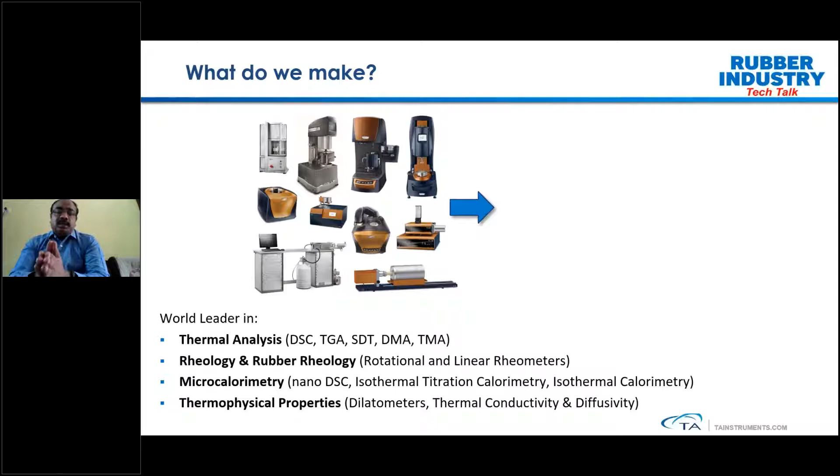Again, here we have got various instruments such as dilatometer, thermal conductivity, diffusivity. These instruments are mainly used to understand the physical properties, thermophysical properties such as thermal expansion, shrinkage, thermal conductivity, diffusivity. With that series of products, we are actually touching every aspect of material. You can name anything - polymer, thermoplastic, pharmaceuticals, thermoset, inks or coatings, rubber, elastomers. We are there, we have a solution for that.

We have our instruments, and most of our customers are using our equipment mainly for having a better understanding about the molecular structure of their particular materials. And today also what we are going to focus on is more about thermal analysis, where I'm going to show you how our instruments are going to help you to have a better characterization of rubber and rubber polymeric materials.

Let's get back to the topics of today's about thermal analysis. If it comes to the typical properties which are measured by thermal analysis, one is the weight. So we subject the sample to a change in temperature, and then we will be seeing how the weight of a sample is going to change. That is we call as thermogravimetric analysis.

Another aspect is about the heat flow. So when you change the temperature of your sample, how the heat flow is changing - that is measured by measuring the heat flow. These are the two techniques we are going to focus on today. One is the weight - performing analysis by thermogravimetric analysis. Another aspect is heat flow, which gives you more information about the thermal transition of the particular polymeric material, using differential scanning calorimetry, or we call it DSC techniques.

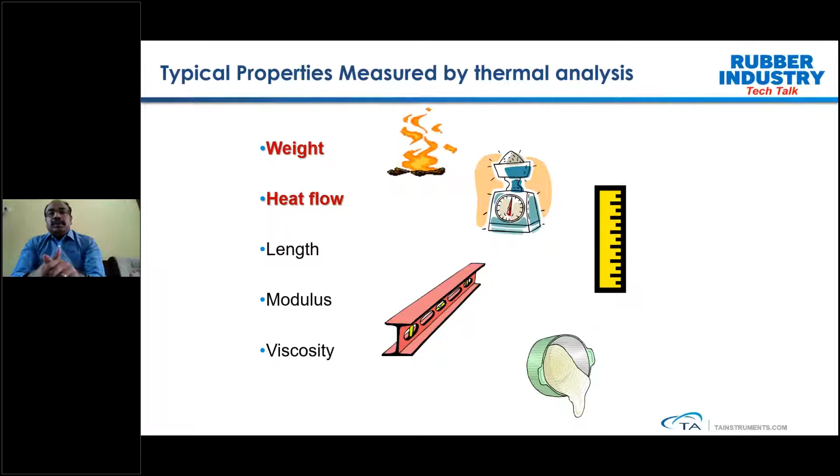So let's start with the TGA, that is, what is thermogravimetric analysis. In thermogravimetric analysis, the main aspect that we are going to measure is change in weight of your sample - it could be loss or gain - against the function of temperature or time under a controlled atmosphere. So basically the thermogravimetric analysis, or TGA, is going to measure the sample weight changes with respect to temperature or time in a controlled atmosphere.

So what are the common uses of these equipments? Mainly as far as rubber is concerned, you can perform a composition analysis of the material. As all of us know, rubber is a multi-component system, so if you have a better understanding about the composition of a particular rubber compound, you can make use of TGA techniques, and that gives information about the composition of the particular rubber compound. It's also a very helpful tool to understand how much filler - inorganic filler - is there, or in case of a pipe, fiber reinforced plastic, how much fiber content is present. That information also TGA can give.

Another major aspect is carbon content. As all of us know, in the rubber industry carbon black is a very important aspect to improve its mechanical performance, and one has to clearly understand how much carbon black is present. It could be for a quality control aspect, like if you want to maintain a consistent mixing quality, or in case of doing a benchmark compound or a defective compound comparative study where you want to understand the carbon black content.

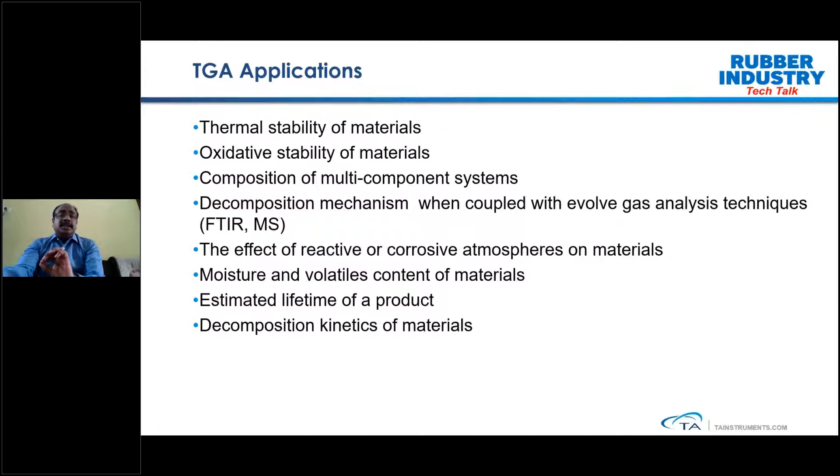So we are taking a few mg of sample. Generally it will take 10 to 20 mg of sample and put it in a crucible, a TGA crucible. It could be made up of either platinum or ceramic, and then we heat it up at a ramp temperature of 20 degrees centigrade per minute up to 600 degrees under inert atmosphere, where in this case it's nitrogen as the inert gas.

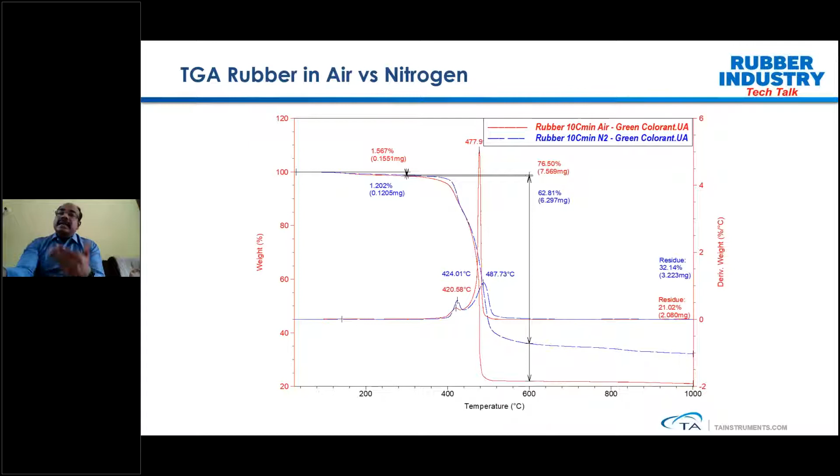Now let's talk about the limitation of standard TGA, and then we can talk about the advanced mode, which can be a solution for dealing with this kind of complicated situation.

Many times, if you look at the standard TGA, you may see a kind of complex thermal scan with broad weight losses, like what you see here. And many times you see overlapping weight losses with multiple peaks and shoulders, like here, where the sample is showing a multiple decomposition pattern that is also overlapping.

So when you do the compositional analysis, you should know the onset of decomposition and the end set, so that you can easily calculate the associated weight loss. But in this case, since the transitions are overlapping, it is a bit difficult to easily calculate exactly when the decomposition is starting. Many times, many occasions, we may have this kind of challenges when running TGA samples.

So here comes the advanced mode called high-res TGA, which is basically a sample controlled TGA. One should understand the difference between a temperature controlled TGA and a sample controlled TGA. In sample controlled TGA, what we are doing is regulating the heating rate based on the nature of your sample's decomposition.

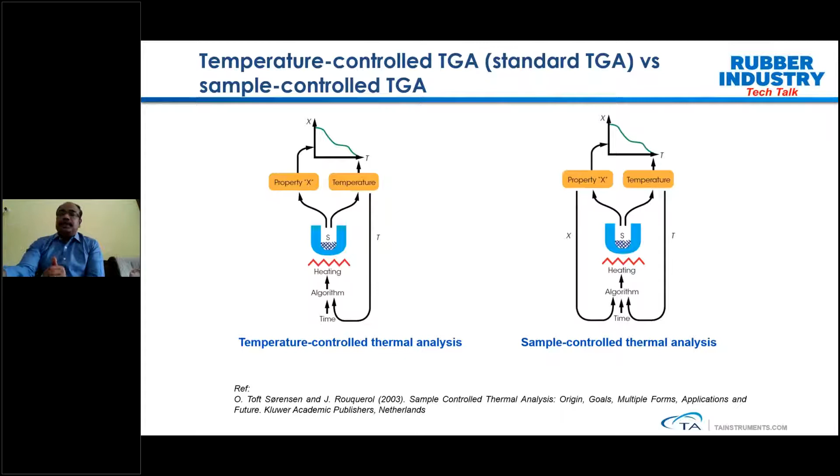This way it will have a dynamic heating rate. Depending on the pattern of how the sample is going to decompose, the control mechanism or the associated heating rate also changes, and that we call dynamic heating rate, high resolution TG. So what improvement are you getting? You're able to resolve the decomposition pattern in a better way. That's one of the key advantages. You can see how the decomposition pattern is resolved in a better manner, and your derivative peaks look very, very sharp, which is the advantage of high resolution TGA.

Here you can see an example for the polyurethane samples. We've taken a polyurethane, and if you see the decomposition, the standard heating orange color curve runs at 10 degrees centigrade per minute. The high resolution TGA starts at 50 degrees centigrade per minute. So what we see is a sharper peak, and you can see the clear shift of the decomposition pattern. But look at the derivative peaks - they clearly show sharp peaks, so now we can get the decomposition in much better resolution, and we can clearly separate overlapping events. This is the clear advantage of high-res TG.

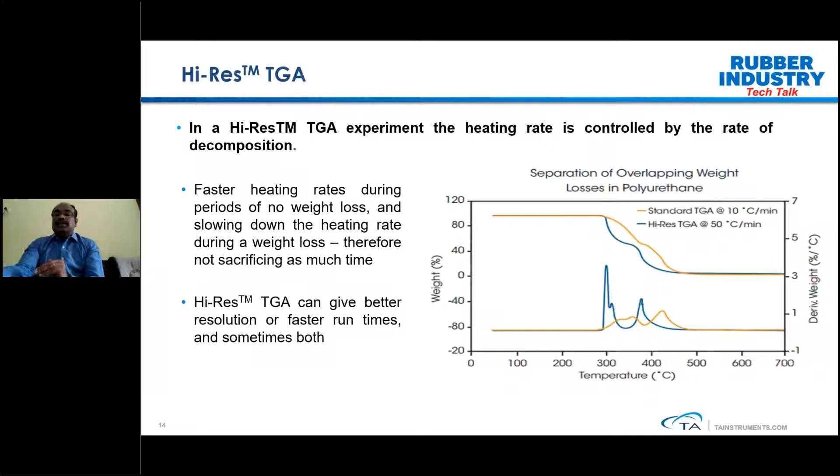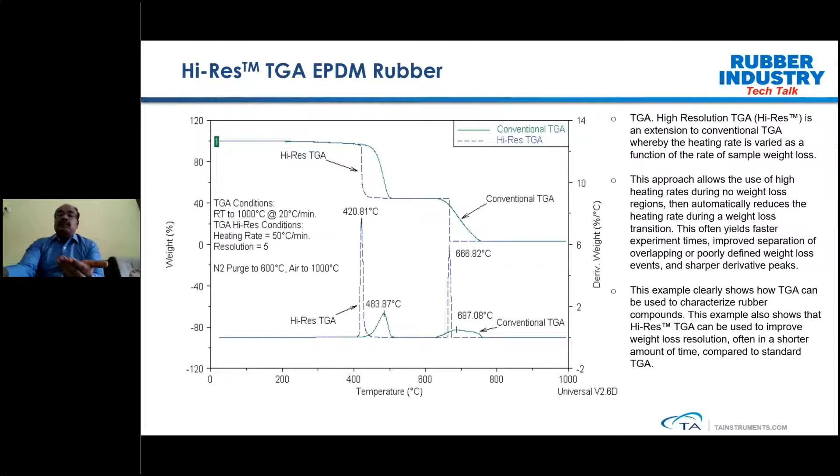In this case, though we started off the heating rate initially at 50 degrees centigrade per minute, as soon as the sample reaches the initial weight losses, which is observed around 420 degrees centigrade, the heating rate will be completely reduced, allowing the kinetics to complete and the sample to fully decompose, which gives sharpened weight losses. Afterwards, once the weight stabilizes and the derivative comes close to zero, the heating rate kicks off again to a higher range, and finally we go to the next level of decomposition. This way we resolve overlapping events better, helping us quantify each weight loss in a better manner - something that could be complicated in many standard TGA runs. This is the clear advantage of high-res TGA.

Another high-res TGA option we have is high-pressure TGA. The instrument offers this as a model called HPTGA 750. In a normal TGA run, we always study material properties in two aspects - either time and temperature, or we change the atmosphere. But we all know the kinetics of decomposition also varies with respect to pressure, which is often an ignored aspect. In real world conditions, polymeric materials or rubber materials, during processing, might be subject to elevated pressure. Imagine extruding a rubber hose, where the rubber polymer material would definitely be exposed to higher extrusion pressure, and we may not know how a particular rubber polymer will behave at that elevated temperature and pressure. That's where high pressure TG comes in.

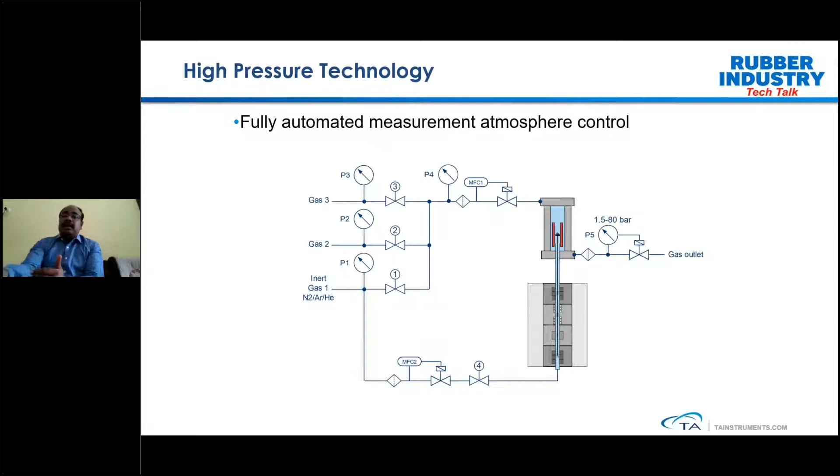This is offered by TA's advanced patented technique, using unique technology called magnetic suspension balance, which facilitates not only studies at elevated pressure but also allows use of corrosive atmosphere. You have a pre-gas mixing solution connected to a pre-reactive gas system, and you can create a very corrosive atmosphere, which is many times not possible on standard TGA. This is one of the very superior technologies. The benefit is that you get a better idea of how a particular polymeric material is going to decompose not only as a function of temperature, but also as a function of pressure.

This clearly signifies how pressure actually fastens the decomposition process. So by using techniques like high pressure TGA, you have the ability to study material behavior not only with respect to temperature or time, but also as a function of pressure, which gives a much more deeper understanding of the material. That will help you design your processing when dealing with a particular polymer, and avoid a lot of situations during processing of your polymeric material.

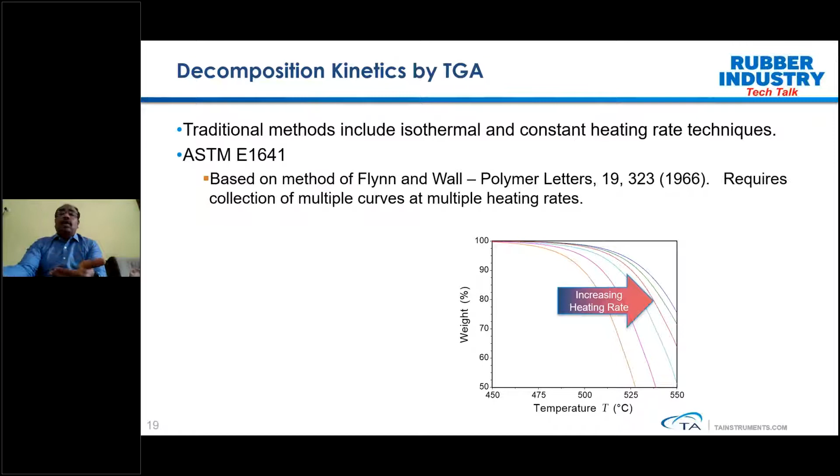What we do is capture the conversion rate, as per the ASTM technique, at 3 to 4, or 6 different heating rates, and then plot the heating rates versus inverse of temperature. The slope basically gives the activation energy divided by the gas constant. That multiplied by the gas constant will give you the activation energy.

So if you wish to understand the activation energy of your decomposition, you would be doing these faster studies. But now you don't need to do this kind of study. The benefit is we have a technique called modulated TGA. I'm skipping this because the idea is how you can do this study, understanding polymer decomposition kinetics, by a single run.

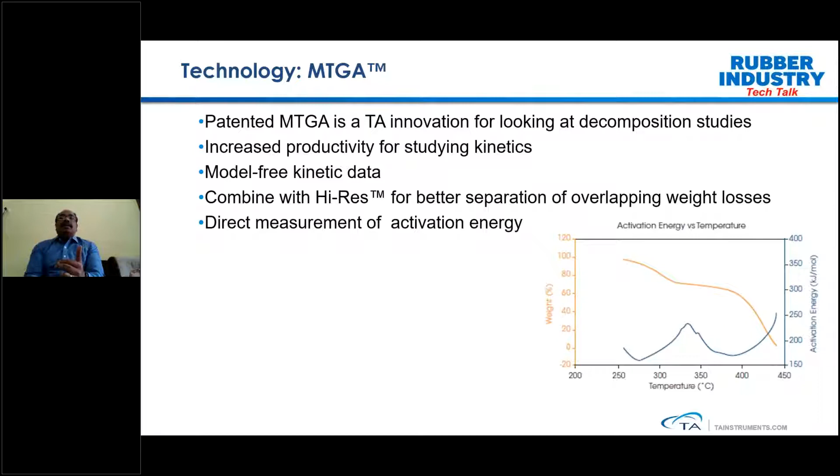As I explained, the normal ASTM technique involves multiple heating cycles, but in this case we don't want to perform multiple cycles. In a single heating cycle, you would be able to calculate the activation energy. That is called modulated TGA.

The way it works is that instead of applying a standard heating rate, we apply a modulated temperature ramp, in a sinusoidal fashion. Then there is a backend algorithm which will plot the activation energy, like in this current thermogram, showing a polytetrafluoroethylene sample.

So we can see a simple state change, and then we plot the activation energy in real time. As the sample undergoes decomposition, we can see how the conversion is present, and what the activation energy of that particular sample is, which is 354.

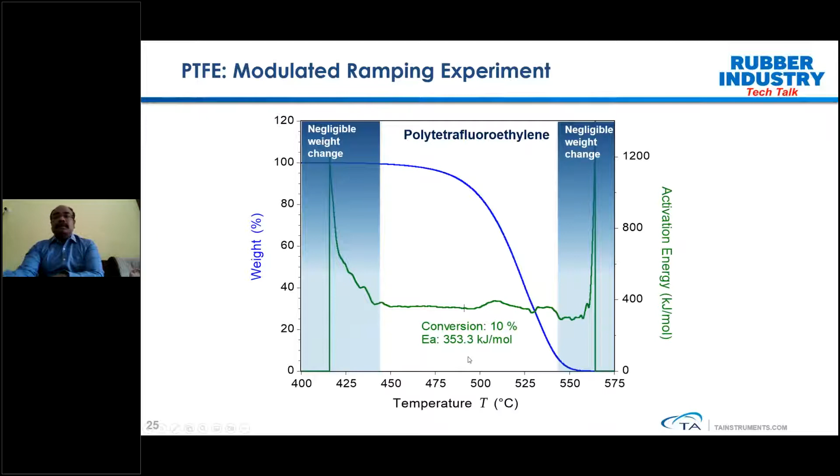So that's about the advanced techniques on the TGA. Let's talk quickly about the DSC part. So what does DSC do?

DSC is basically a differential scanning calorimeter. It will measure how much heat changes with respect to the temperature of your sample. We put the sample and reference, heat them, and then we can see how the sample undergoes changes, especially when it undergoes any phase transition. It could be glass transition temperature, crystallization, or melting. Then we can measure the associated heat flow of that.

Let's say if you look at heat flux DSC, there are two concepts: heat flux DSC and power compensation DSC. Heat flux DSC, as offered by TA, has many better advantages compared to power compensation DSC. In a heat flux DSC, you have a single furnace, with a reference sensor and sample sensor. You keep a few milligram samples on crimped pans on the sample sensor.

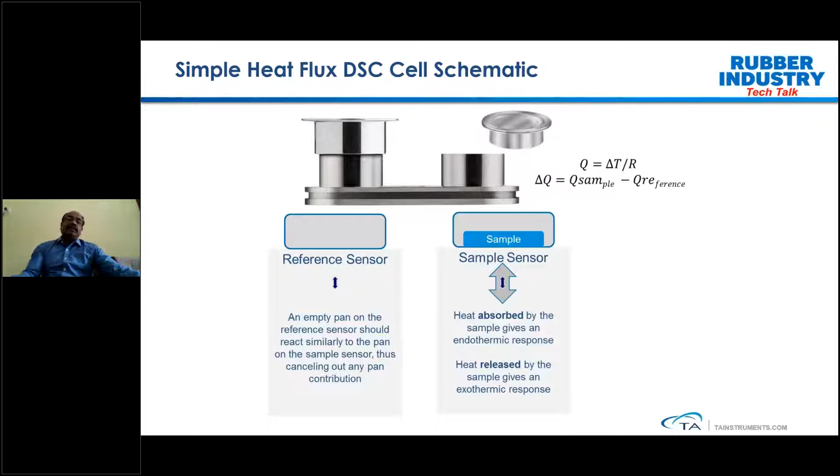Then we see how the temperature of the sample is changing with respect to the programmed temperature. The fundamental equation involves two aspects causing heat flow changes: one is heat capacity changes and the other is kinetics. The heat capacity change is usually, for example, as the sample undergoes the glass transition temperature, your heat capacity changes before and after the glass transition temperature.

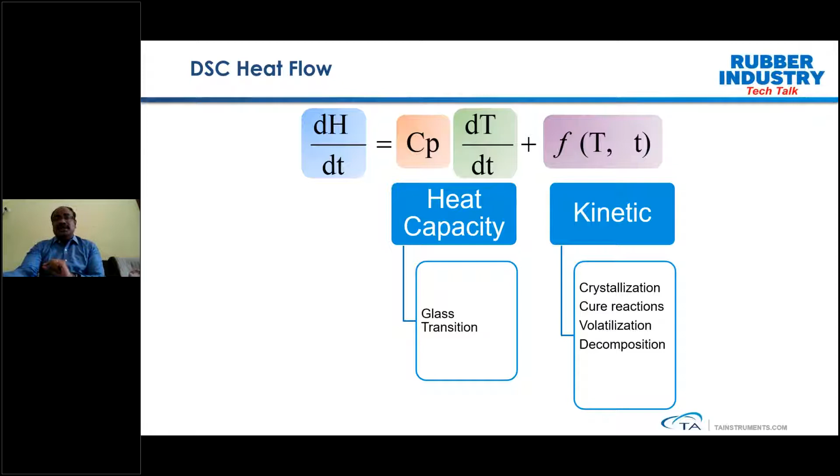So that the DSC can detect heat flow changes when, for example, a sample undergoes some changes with respect to kinetics. For example, let's say you have a rubber compound which undergoes a curing process, that can be measured by kinetics as a function of temperature. That also is going to alter the heat flow. So this will give complete information on how the sample is going to change its transition or the associated kinetic transition, and we can quantify the heat associated with that particular transition. So that's about the Discovery DSC 2500.

If you look at typical thermograms, whenever a sample undergoes any endothermic or exothermic activity, we see that as a shift in the heat flow. When the sample undergoes glass transition, it's observed as an endothermic event. In case of crystallization, the curve goes in the exothermic direction, so we see an exothermic peak. And if it's melting, you see an endothermic peak. Same way, if you're dealing with a thermoset, like a polymer rubber compound undergoing a curing process, you can measure the cross-linking by measuring the exothermic reaction. And anything related to oxidation, you can measure from the oxidation part, like in the OIT application.

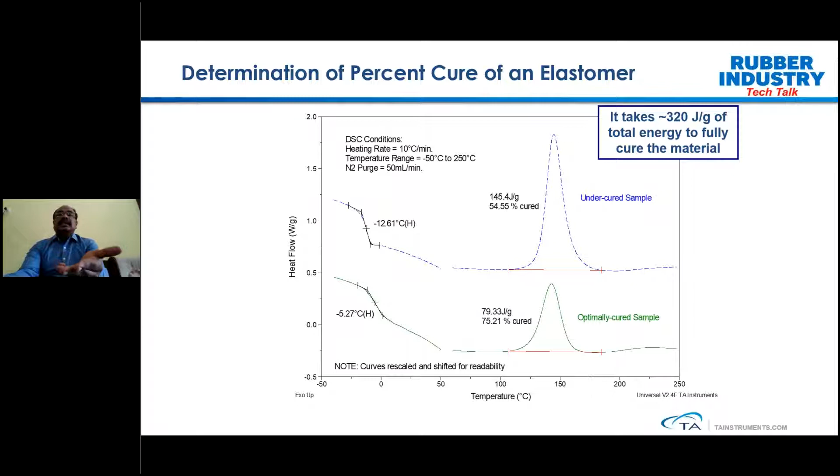Whereas the blue compound shows a lower Tg as well as a higher residual cure. This is the second time we're running the sample on the DSC, so this is the thermogram behavior for that second run. Coming back to the blue curve, when you account for the energy, which is higher at 145.4, if you take the ratio, the blue color compound is cured only 55%. That is the reason we say the sample is undercured, and that also reflects in the glass transition, which is at a lower temperature. So this way you can see how DSC is really helpful to understand these things.

Now I want to talk about the advanced mode, MDSC techniques. MDSC is one of the pioneering and most advanced techniques in DSC. The major benefit of MDSC is that it increases your sensitivity in detecting very weak transitions. The second major advantage is that it helps us avoid overlapping thermal transitions. Imagine running a sample that's a mix of two polymers, and you're trying to understand the glass transition temperature of each, which might occur at a close temperature range, making it difficult to distinguish. But with MDSC, you can resolve those things in a much better way.

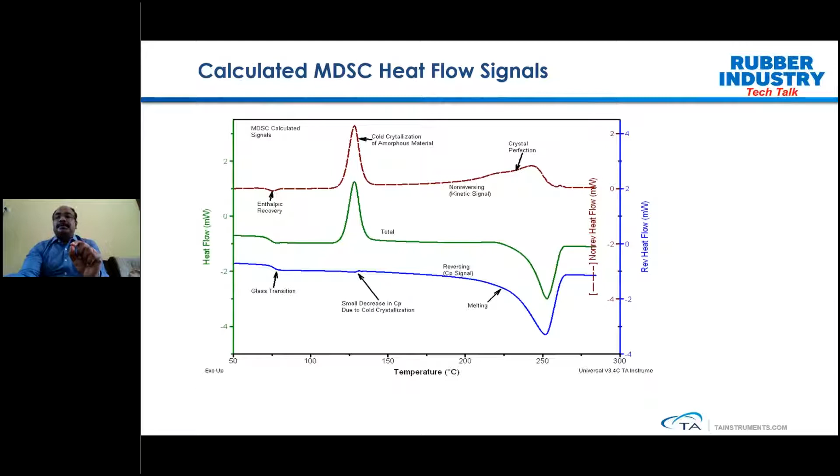So this way, now you are better equipped to detect where exactly the glass transition temperature is, and the glass transition temperature also looks broader and more detectable. So that's what we are talking about here. The MDSC can give you three signals total, which carry all the transitions.

The reversible heat flow only shows the heat flow related to heat capacity, and the non-reversible takes all the transitions due to kinetics, which could be evaporation, crystallization, curing, all sorts of such transitions.

Now I'm going to show you my last application, how in a practical situation the modulated DSC is going to be helpful. Many times polybutadiene, which is one of the important rubber compounds used in the tire industry, is mixed with other polymers. So it would sometimes be very difficult to quantify how much polybutadiene is present in a particular mixture. The DSC can be used for that purpose.

When you run 100% polybutadiene, we can clearly see a glass transition temperature around -100. In DSC you have the ability to take it to negative temperature. In this particular DSC, the run is performed with the help of liquid nitrogen, so we started off from -160 degrees centigrade, and we can see a clear step change because this is 100% polybutadiene.

So we can see that, and as you heat further, the amorphous compound converts to crystalline, and as you heat further still, you can see the endotherm due to melting, and the same is reflected in the heat capacity signal also. You can see the heat capacity increasing above the glass transition temperature.

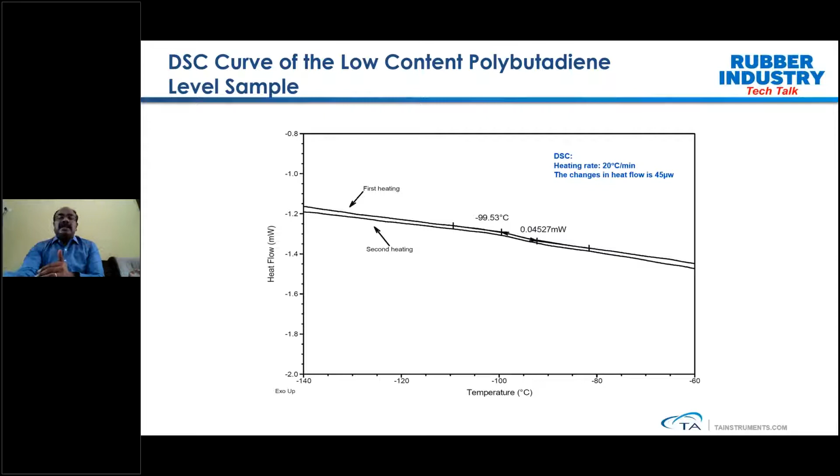Now, when you come to the low content polybutadiene sample, because this is an unknown sample, we want to understand how much polybutadiene is present in this particular polymer. When you look at that, it is very difficult, nearly impossible, to detect the glass transition temperature which corresponds to the polybutadiene. Now, what we are doing is testing the same samples in modulated DSC.

Now you have the ability to clearly plot the reversible heat flow, because as per our experimental condition, we need to see the reversible heat flow, which shows the transition of especially the glass transition temperature of the polybutadiene. So we are plotting here the reversible heat flow against reversible CP, also against temperature.

And this is the total heat capacity of 100% polybutadiene. When it comes to the unknown sample, we are measuring 0.022 joules per gram degree centigrade. If I take this ratio, I can clearly quantify even 6.6% polybutadiene present in the polymer, accurately, by using modulated DSC.

So this is one of the key advanced benefits of this modulated DSC technique, and that is what you are getting out of this analysis. With that note, I summarize my presentation.

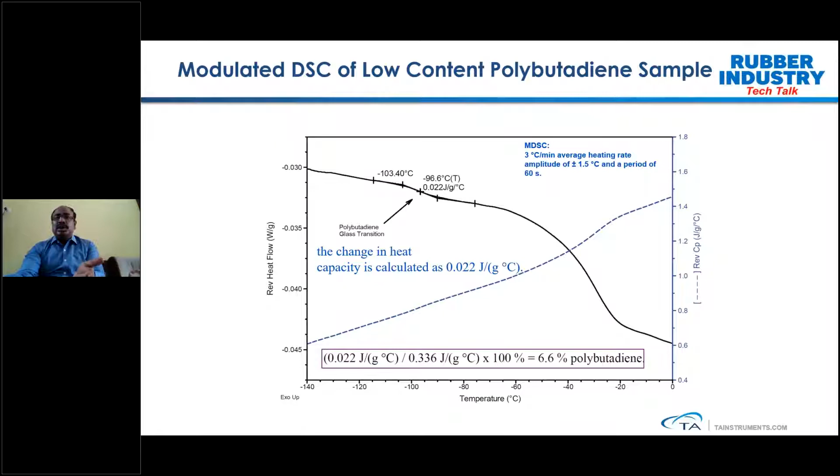As I highlighted, TA Instruments is today one of the recognized market leaders in advanced thermal analysis equipment. We have a large selection of thermal analysis products and techniques available for thorough material characterization, catering to broad application areas, whether it is polymer, pharmaceuticals, life science, or energy. We are offering a comprehensive solution for your thermal analysis problems, and we are also committed to innovating new technology, like FDSC and other techniques.

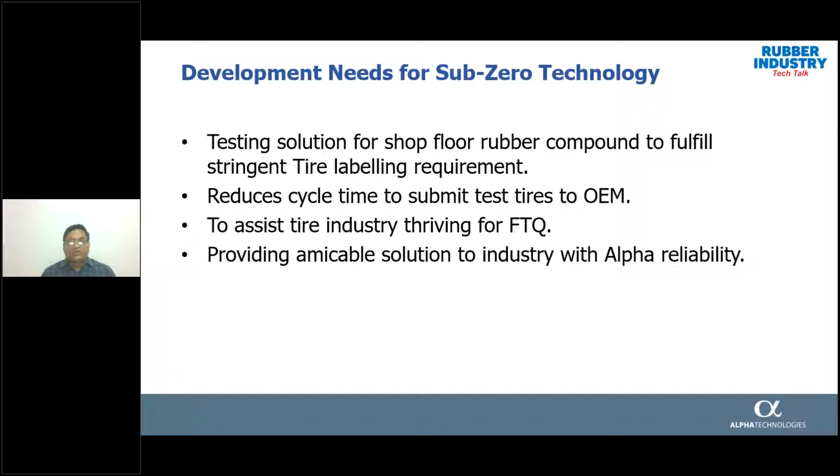After defining the needs of the Sub-Zero technology, we decided what should be our focus. Our focus is to define one single test to qualify the rubber compound processing properties, cure properties, and tire performance properties indicator. The second focus was liquid nitrogen free cooling that ensures the safety of laboratory personnel and the determination of real-time data based on the actual shape factor of sample at test temperature. Last but not least, to bridge the gap between the shop floor mixed compound and R&D developed rubber compound data.

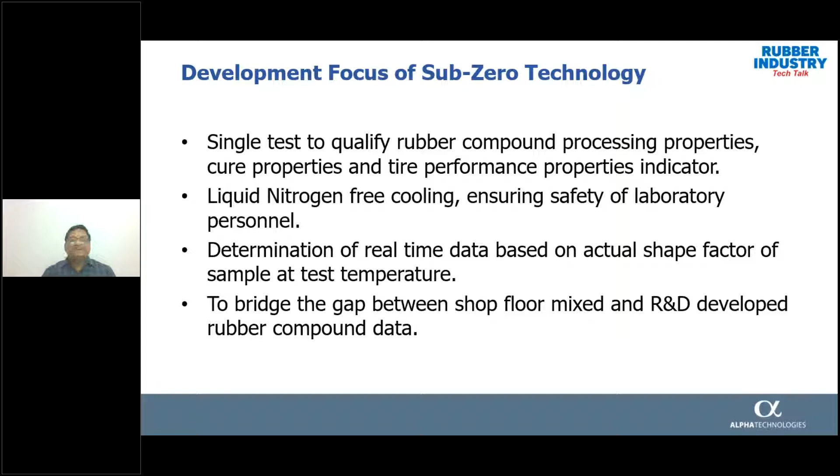Thus, Sub-Zero technology optimizes the amount of sample to be used for testing, and reduces the process of testing time. Say for example, DMA requires a minimum of 18 hours of sample stabilization after sample preparation to the test, and this eliminates the need of DMA.

Thus, RPA Sub-Zero is a one-stop solution for all you need for quality control and R&D testing for processability, cure properties, and tire performance laboratory measurement. It uses the same rubber sample, thus it saves energy and efforts with alpha reliability, and it encompasses lower capital spending. On the right hand side, you can see the data comparison graph between RPA and DMA. The green one is RPA, while the blue one is from the DMA in tension compression mode. And in one single test, you can determine the...

laboratory predictor for tire performance on ground of ice traction, wet traction, dry traction, and rolling resistance.

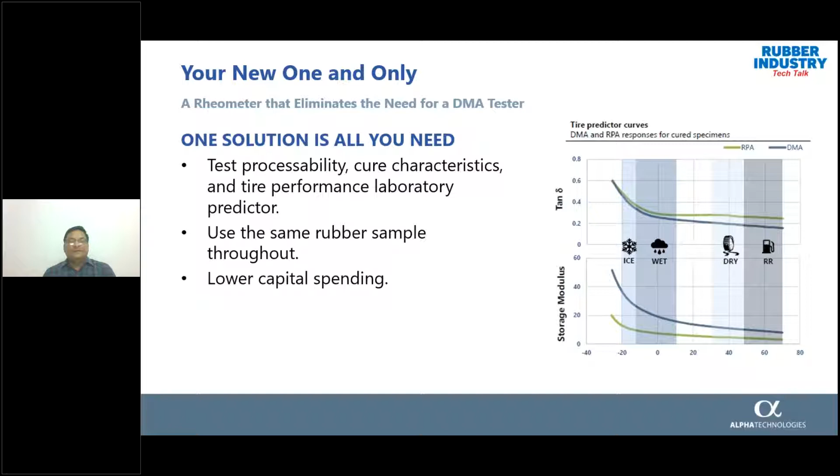Now let us look at the specification for RPA Sub-Zero technology. The frequency ranges from 0.0016 to 50 Hz. The strain ranges from 0.07% to 1255%. The temperature is from negative 25 to 230 degrees centigrade, and the maximum temperature ramp rate above room temperature is 1 degree centigrade per second, and the maximum die cooling rate above room temperature is 0.5 degree centigrade per second.

You can see here how we go to the sub-ambient temperature, from 60 to 30 degrees centigrade, it cools down at a rate of negative 7.5 degrees centigrade per minute, while from 30 to 0 degrees centigrade it cools down at a rate of negative 5.5 degrees centigrade per minute, and from 0 to negative 25 it cools down at a rate of negative 2.5 degrees centigrade per minute. So we have very controlled cooling of the die, and we can attain temperature accuracy of plus or minus 0.2 degrees centigrade at negative 25 degrees centigrade.

We determined the reproducibility of our standard compound is less than 10% at sub-zero temperature, and the average repeatability for compound at negative 25 degrees centigrade is less than 6%. The torque range is from 0.01 to 225 dN·m. The torque, temperature, frequency, and strain are the measured data, while the calculated data are the modulus, the compliance, the torque, tan delta, and the real and imaginary component of viscosity with the complex component of viscosity.

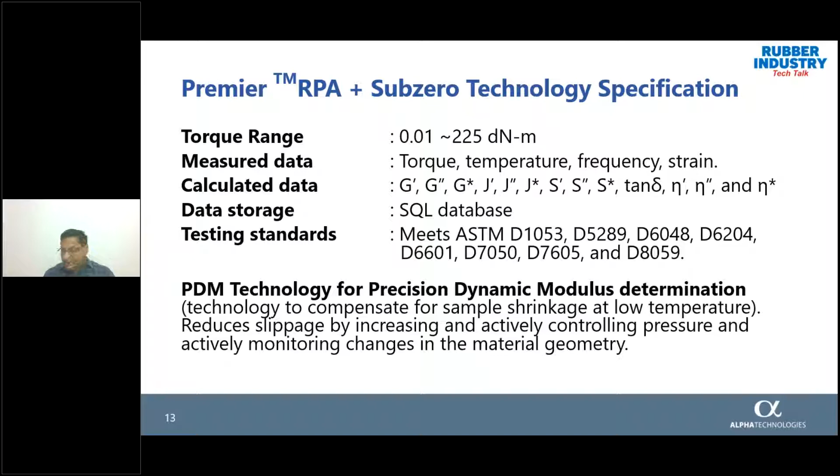So the PDM technology uses real-time shape factor for calculation of modulus. Since the shrinkage is being actively monitored, it is actively compensated to reduce the sample slippage. By actively controlling and monitoring the sample, we are able to minimize the sample slippage during dynamic deformation.

So this technology has reduced the COV for cured SBR by 49%, and for uncured SBR, the storage modulus COV has been reduced by 81%. So with PDM, huge improvement in data is observed, and on the right hand side you can see the specification band has been reduced a lot for uncured SBR compound, as well as for the cured SBR rubber compound, and you can see the accuracy and precision of the data is improved.

With the help of precision dynamic modulus technology, we are using the actual shape factor at the test temperature.

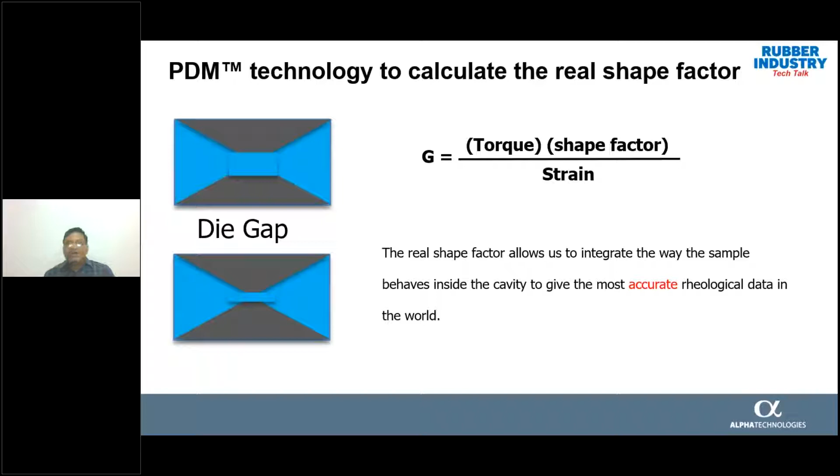So we are giving the most accurate rheological data in the world for the modulus values. Now I wish to show a test example from the Premier RPA and the DMA, that is rubber process analyzer and DMA. Here all the test conditions remain the same except the mode of deformation.

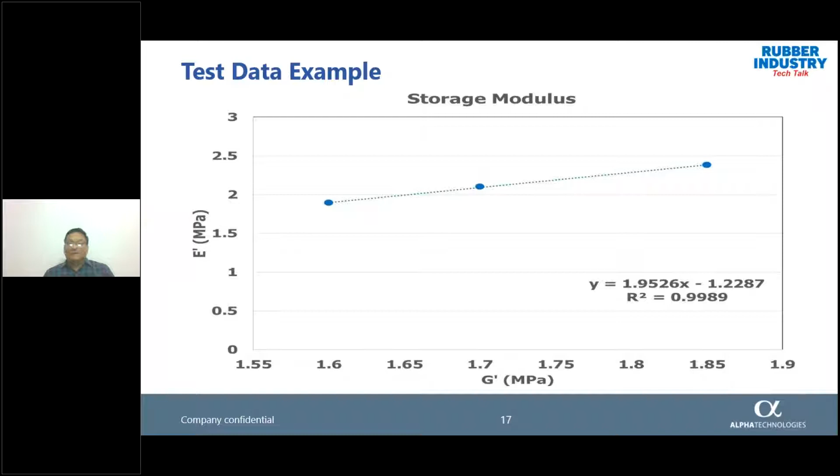Now, what is the way forward for us? In the 3 decades after introduction of RPA 2000, the RPA has come a long way, and we will continue to strive to further improve our process, product, and its performance.

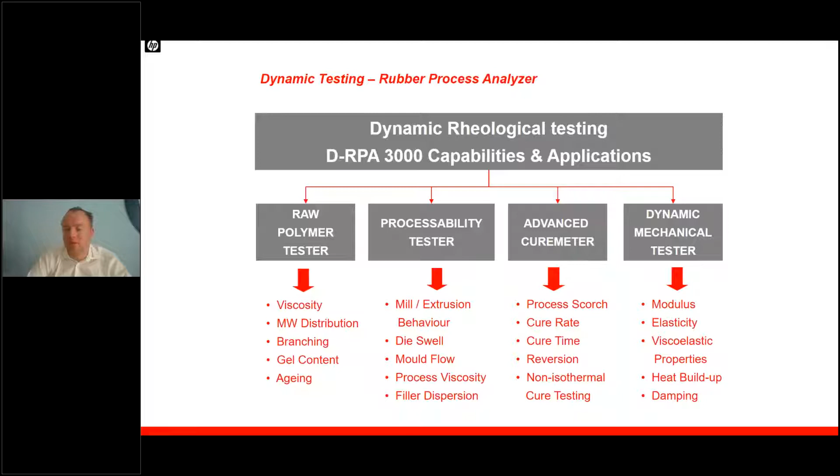Also, the RPA was not successful in covering all related shear rates to rubber relevant processing steps, especially injection molding, extrusion, mixing, calendering processes had always been a challenge to be simulated with the RPA due to the shear rate limitations

in oscillatory mode. Therefore, Montech has recently introduced the Advanced Applications Package. This is a new drive technology, a new control technology for rubber process analyzers, allowing not only to use the instrument in oscillatory mode, but also using the RPA as a rotational rheometer.

So it's a combined system that can do all the classic things the RPA was always capable of doing, with oscillatory frequencies up to 100 Hertz, strains up to 5,000%, that typically translates into shear rates of about 100 per second. However, with the newly added capabilities of continuous rotation of the lower die in a rotational mode, shear rates up to 750 per second.

So it means a 7.5 times higher shear rate range can be achieved. This adds the capability to classify and simulate successfully also high shear processes, once again, such as milling, calendering, injection molding, and extrusion.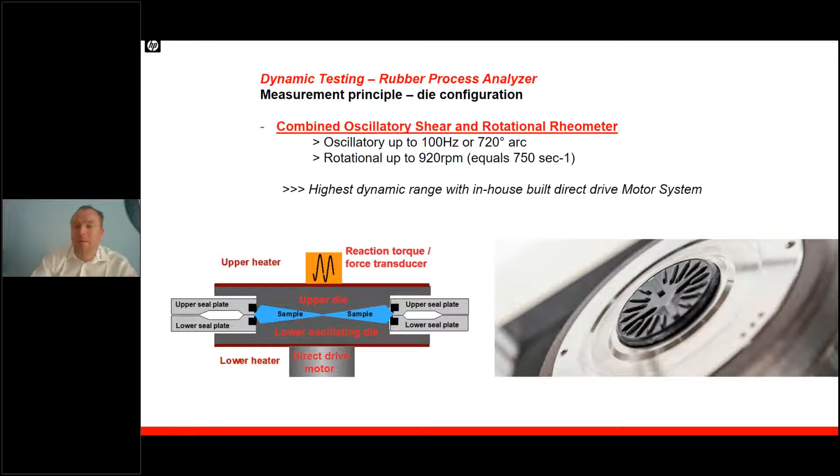However, for specialty purposes, we offer over 40 different test die arrangements. Test dies can, for example, be flat dies for composites, for resins, but also can be flat or grooved, flat or conical polished dies to intentionally measure wall slip.

By comparing data with and without wall slip, the exact extrusion behavior of materials slipping in the extrusion barrel could be tested and quantified, providing important information on the material's viscosity during high shear processing.

Other processing techniques and measurement results include high shear heat buildup and thermal conductivity measurements, which can be realized by simply switching off the heating control system of the instrument and measuring thermal conductivity from the high shear lower die to the upper die. This is suitable not only for rubber materials, but also, of course, for thermosets, thermoplastics, and our new application group, also food, can be tested with rubber process analyzers.

This system is complemented with our unique die pressure management measurement and control system with a controlled closed loop normal force, not only controlling the die gap, but closely controlling the normal force on the sample.

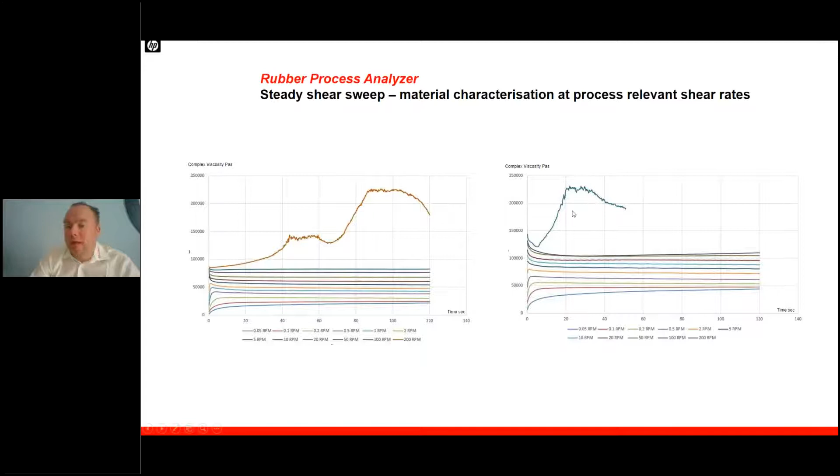This now allows us to simulate complex test sequences. For example, we have looked with one of our customers at an injection molding process, where material passes through different temperature zones, as well as experiences different shear rates while traversing through the machine.

First, the material is fed into the injection barrel. Then we have our high shear injection phase, where the material is pushed through a nozzle into the mold, and then our temperature increase and the actual molding cycle.

And this, combined with our molding phase, now allows us to get a full rheology profile of not only the curing, but the full process the material passes through, gaining a much better understanding of material properties, but also enabling a tighter control of your process, detecting batch-to-batch variations before they translate into processing errors.

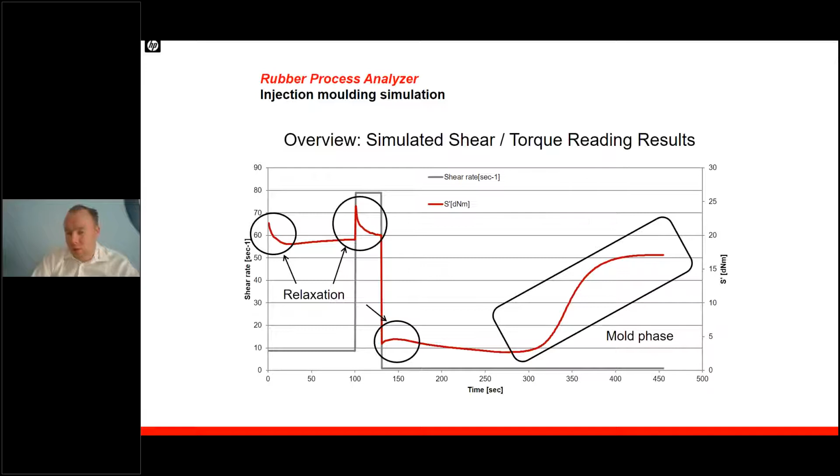All this can be complemented with one of our cooling or advanced heating systems. Typically, our instruments range from ambient temperatures to 235 degrees thermal range. With our MCOOL 10 system, a vortex cooling system specially developed for medical applications, for example silicones, allows cooling of the test dies sub-ambient to a lowest temperature of 10 degrees C. This is a very cost-effective system, not requiring any additional space as it's fully integrated into the machine.

Most of the manufacturing processes in the rubber industry are not isothermal. What this means is the material passes through different temperature zones, which we see here, the material getting heated up in about 3 minutes from ambient temperature to 160 degrees. The same can be simulated with a rubber process analyzer to understand curing under these specific thermal conditions, as well as changes of elasticity and viscosity. All this can be combined into complex processes, either in different ramps or with different steps, simulating even the most challenging thermal profile. Or if you have a recorded profile, our MonControl software can directly read your thermal profile from a file and process it in the instrument.

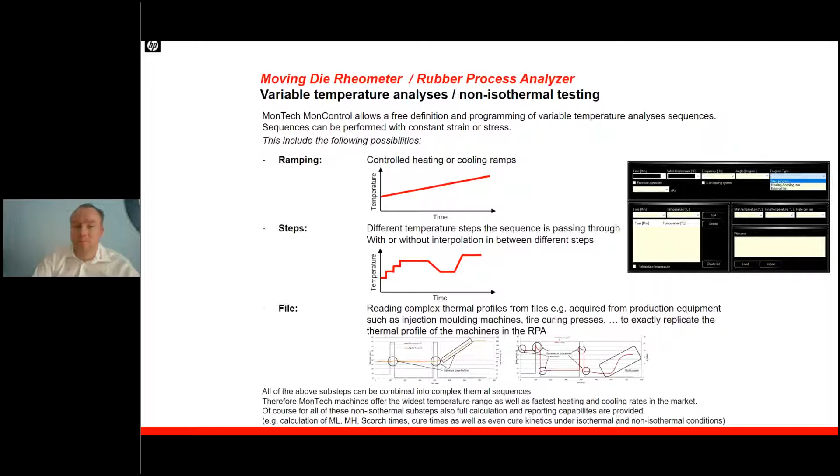That brings us to a couple of applications for our MCOOL-40 low temperature cooling system. Here we have an example where we measure glass transition temperature successfully with the RPA. We have also been looking at the plasticizing effect of oils, different oils or different quantities of oils in the recipe, changing significantly the glass transition point and glass transition temperature. All this is only possible with our MCOOL-40 options, as we have the widest thermal range covered in the market for low temperature RPAs.

Especially for the tire industry, this system has been found very useful. We have installed more than 70 of these systems at our global tire customers, mainly related to tire labeling requirements, measuring rolling resistance, but also rain or wet traction and ice properties. All this can be combined now in one single machine, in one single reliable test.

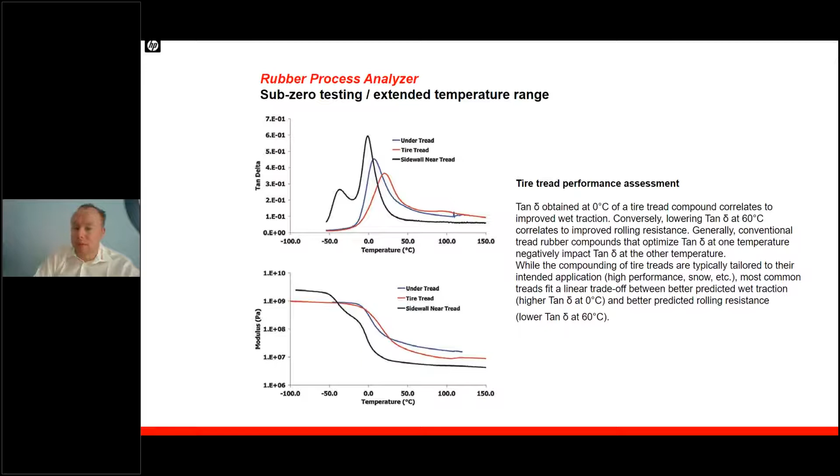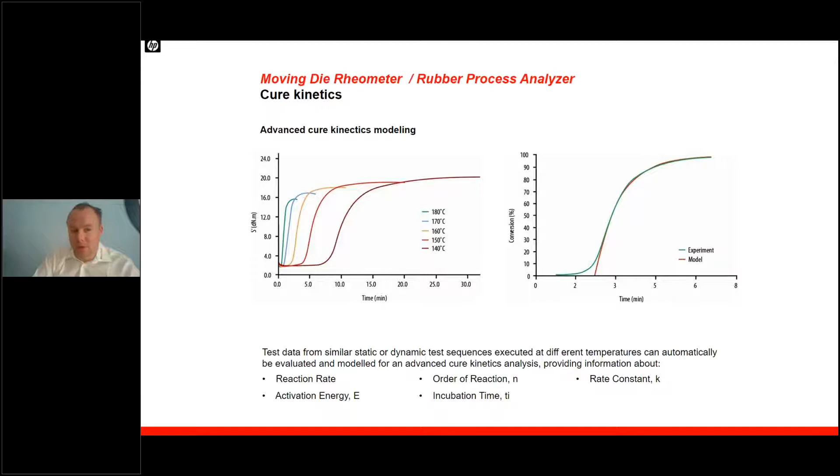Data acquired also allows us to create advanced cure kinetics models, meaning by having rheological data available at different temperatures, we can easily calculate order of reaction, rate constants, incubation time, and most interestingly, also activation energy. This allows us to create normalized cure curves as well as Arrhenius plots, either for isothermal conditions or also, of course, for non-isothermal conditions. This can be used to also simulate processes.

Here, after running the cure test, we have loaded a thermal profile of an autoclave from one of our customers and then compared his rheological data, and we found that his production process was set up perfectly right, as while opening the autoclave, he was reaching exactly 100% cure, avoiding any reversion, avoiding any lost process time and money lost.

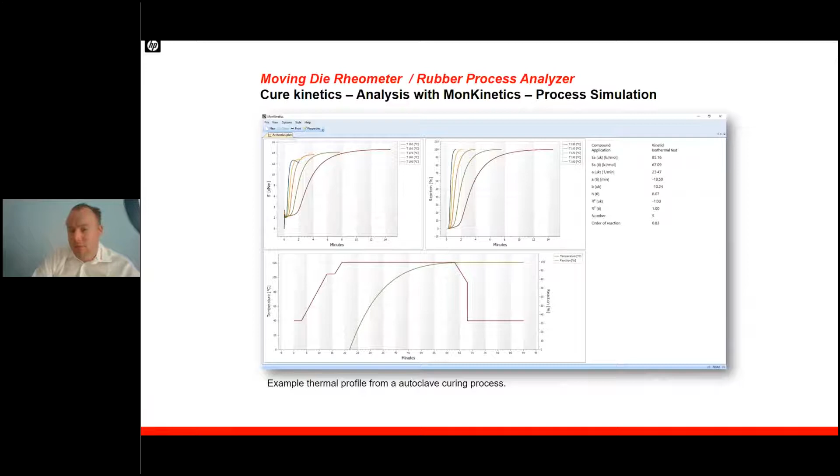This can be expanded to non-isothermal testing by running either heating or cooling ramps and loading them into the cure kinetics models. Also, activation energies for different states of cure, different cure times can be calculated.

Last but not least, this data can also be used to do a 1 or 2 dimensional cure simulation. Here, for example, for a 20 millimeter thick rubber sheet, based on the rheological data, we can tell how fast, at which position of the part, the material will cure, and based on this data, define optimum curing times for parts and geometries.

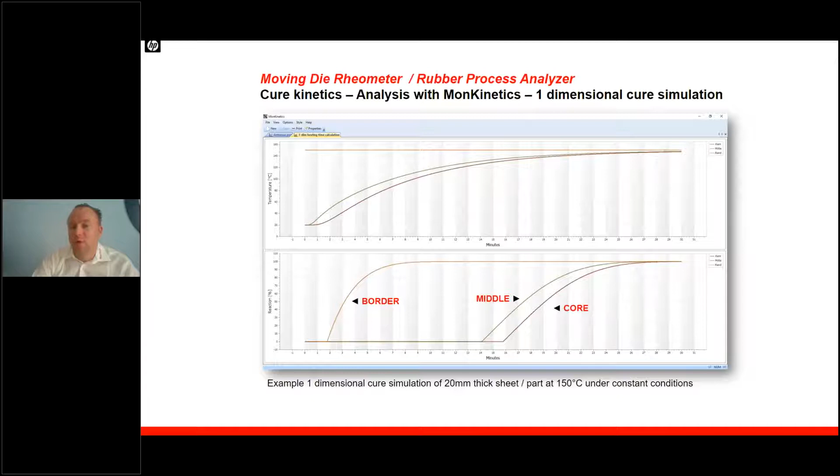My last topic I want to look at is the nonlinear material response, as we are now with our new systems capable of even running higher shear rates, covering a wider testing range. The nonlinear material response is becoming more and more important.

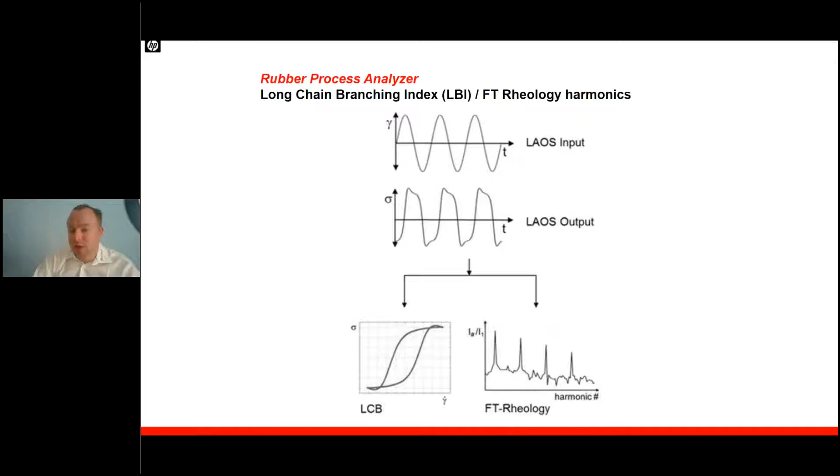Here, the input is still a traditional oscillatory or steady shear, meaning continuous rotation input from the lower drive system. However, our material response is no longer sinusoidal, but a distorted sine wave. We have done extensive research and added Fourier transformation rheology by looking at higher harmonics, meaning frequencies higher than the original frequency, but also by plotting this data in a stress strain versus strain rate format, calculating the long chain branching index. Based on these two models, we are now able to create simplified reports in seconds, providing you a full overview of the nonlinear material response of your items that you are testing, quantifying the level of long chain branching, as well as molecular weight distribution.

So to summarize, low temperature testing creates new possibilities for quick tests on raw materials and compounds, complementing traditional test methods.

Updated testing methods are required to keep up with new raw materials and processing techniques, especially high shear mixing, high shear milling, extrusion, injection molding. And Fourier transformation rheology is a required tool to understand the data derived from these tests and to quantify and correlate to your molecular structure and long chain branching.

So to summarize, all these new technologies allow you, within one single test of only a few minutes, to create a full fingerprint of your material, dramatically speeding up your quality control processes by eliminating other traditional test methods, but also helping you in your R&D to quickly and easier get the right path and understand your new developments and formulations and their properties.

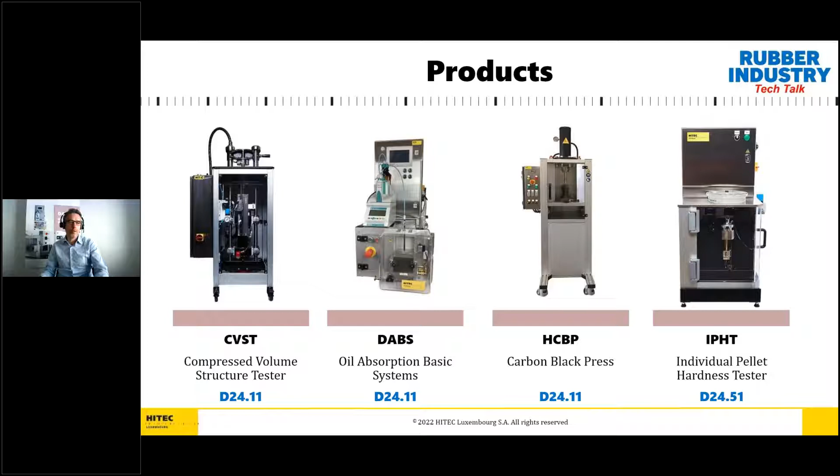Then we have the IPHT, individual pellet hardness tester, used to measure individual pellet hardness. We have a pellet powder mass strength tester. And the last three units are sieve residue testing devices. We will see also the difference between the different devices in the next slides.

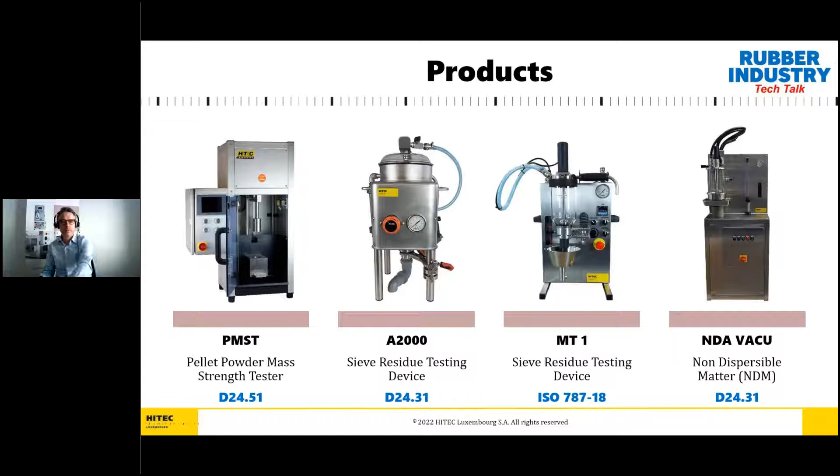Let's talk a little bit about structure properties. Carbon black structure is the degree of irregularity and deviation from sphericity of the shape of a carbon black aggregate. This is the definition coming from the ASTM standard.

Basically, when we measure or look at the void volume, the internal void volume of the aggregates, the greater the measure of the internal void volume, the more complex, open, and branched the aggregates within the sample are, and the higher the structure is. We have two main characterization methods that we can use: the oil absorption number, acronym OAN, or a void volume analysis.

Basically, the difference between the two is that in one case, the oil absorption, we fill the void volume we mentioned before with a liquid, that is, in this case, oil. We have different types of oils, but it's always an oil-based liquid. In the void volume method, we compress the material and measure the variation in volume of the material.

In industry, we can also find a third method of characterization, the COAN, the compressed sample oil absorption number. This third method simulates the typical breakdown carbon black may be exposed to during the mixing process with the rubber. In this case, the carbon black is first compressed in a press, and its structure is measured again using the normal oil absorption system. The difference between the regular oil absorption and the COAN gives you an estimation of the stability of the structure of carbon black during the mixing process.

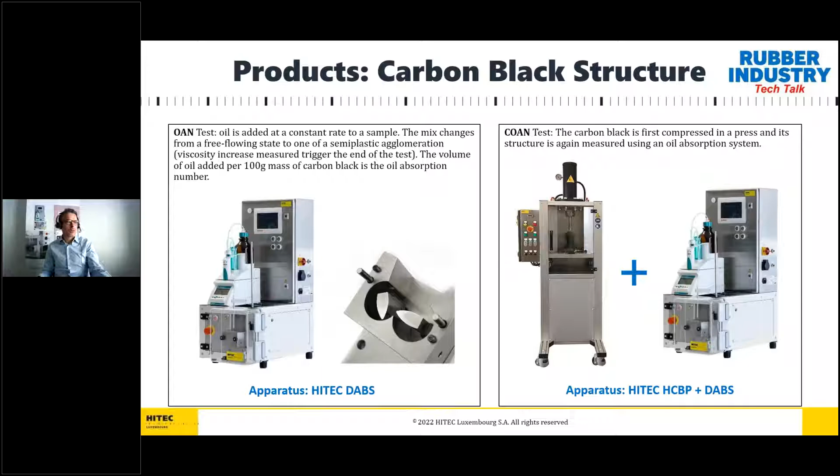We go to the next slide and to the third unit that is used for carbon black structure characterization. In this case, we have a void volume tester, and we measure the compressed volume of a weighted sample as a function of pressure applied. The standard pressure applied is 50 megapascal, but our equipment can go much higher in terms of applied pressure, so for R&D purpose, a user can decide to test also higher pressure.

The key features of our void volume tester are controlled compression and controlled decompression. This is a feature that HITEC has patented. We have a compression chamber available in a half inch, 1 inch, and a special 1 inch for conductivity measurements of carbon black. The standard is normal half inch, but we realize that our customers are appreciating also the 1 inch, because sometimes you have carbon black in fluffy materials and not pelleted, and it's much more convenient to have a bigger compression chamber to fit a larger volume of material.

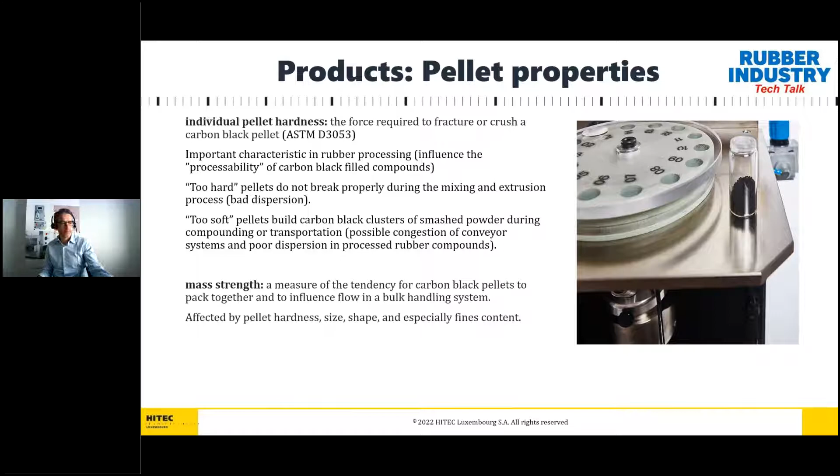When you go to the specific test method to measure the pellet hardness, the sample needs to be first sieved to collect a certain fraction of uniform size, say between 1.4 and 1.9 millimeters. The sample is then transferred into the tester, and the tester collects each single pellet, and each single pellet is pressed against a force capture system. Under the pressure applied, the pellet will either break with a rapid force drop, or will reduce in diameter.

The individual pellet hardness is the maximum force prior to this force drop we mentioned, or when it's not breaking, when the diameter is reducing until 90% of the initial diameter, whichever of the two conditions comes first.

Our equipment reflects more than 25 years of experience in the construction of a pellet hardness tester, and this is the last version, which was released in 2018-2019. It's mounted on a damping table, which reduces the influence of industrial vibration on the precision of the measure, and is integrated with a sample carousel, which allows the operator to load on the machine up to 14 samples and measure up to 14 samples without operator intervention.

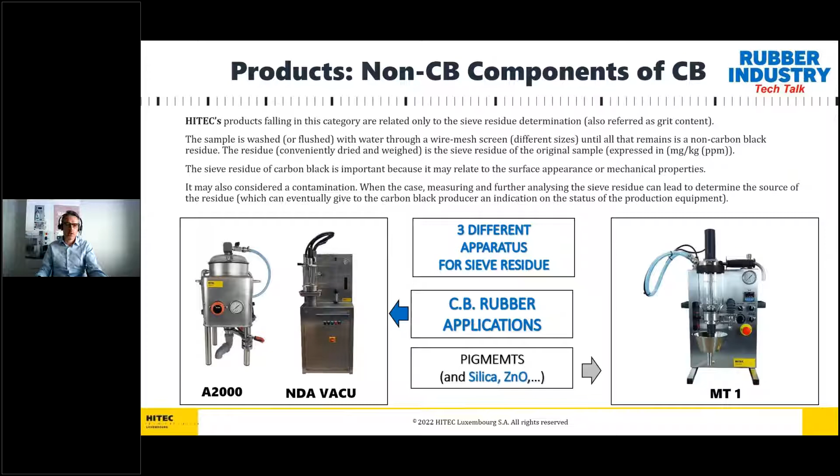Let's see then what the difference is between the A2000 and the NDA VACU. If both pieces of equipment are supposed to be used for carbon black in rubber applications, why should I adopt one or the other?

The A2000 works on a principle described in ASTM D1514, where the material is washed through a sieve. It has a very compact dimension, it's a small machine, it's just less than 50 kilos, and the sample size you can measure is 100 grams. The sieves have a small diameter of 50 millimeters, and we have three different kinds of sieves.

The plastic sieve is a stainless steel mesh but with a plastic ring. We have a stainless steel ring, and a stainless steel ring with an impact tongue. This method is used for carbon black for general rubber applications.

The second equipment, the NDA Vacuum, is more recent — the first edition of the test method is from 2011, and the test method we refer to is ASTM D7724. It's a relatively big machine, and one advantage is that you can measure bigger samples of material, starting from 500 grams as standard according to the test method, up to approximately 1 kilogram. We also have bigger sieves in this case, with a diameter of 100 millimeters.

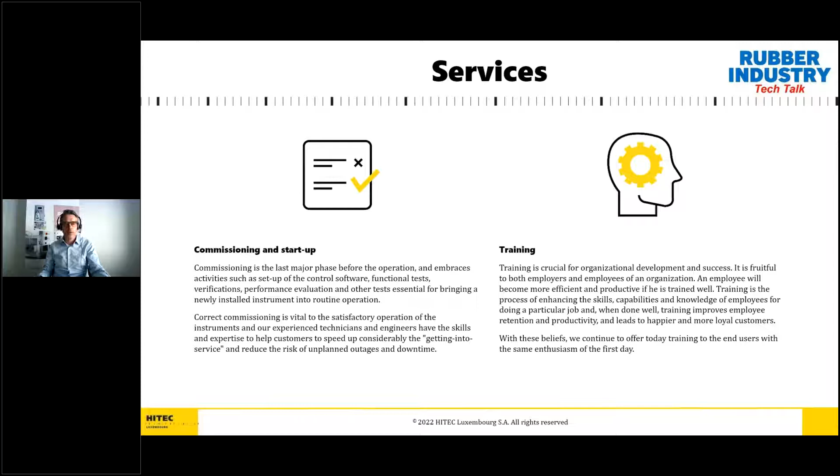This can be commissioning and startup of the machine at customer premises, can be training offered online on the customer premises, can be maintenance, preventive or troubleshooting, and in some cases where we already have experience, it can be custom development.

Our main markets, you can imagine, are carbon black, tyres and rubber. Recovered carbon black is a growing market, along with silica and other fillers.

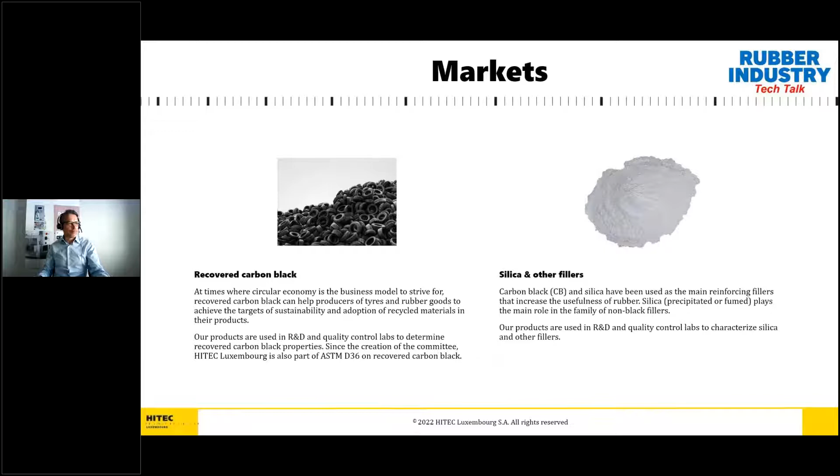In case you have any question, feel free to ask in the discussion after the presentation, or you can text me. You can search on our website, hitec.lu/testing technologies, or shop.hitec.lu. You have this email, sales@hitech.lu, where you can type your question and ask. And we have a great network of local partners, especially in Asia, where we have local partners in China, India, Korea, Pakistan, Sri Lanka, Taiwan, Thailand, and Turkey, but not only.

Thanks to everybody for your attention.

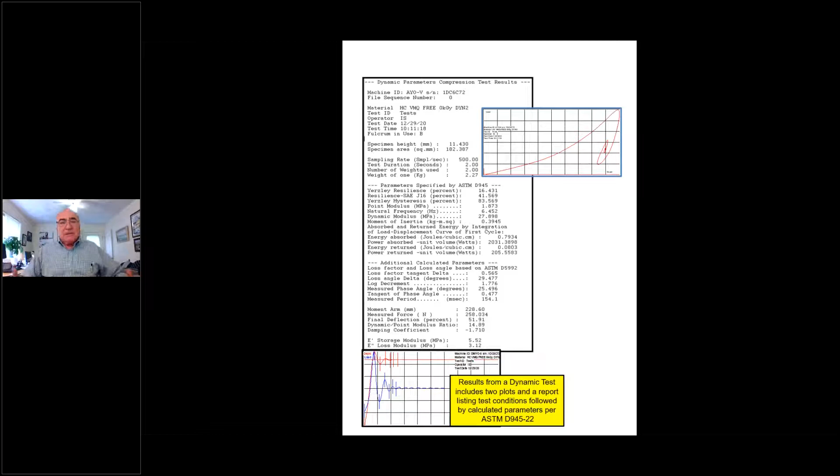Our system is a free oscillation system. The forced oscillation system is based on hydraulic, piezoelectric, or other actuators, which can scan all the way up to a given hertz, and then it has to calculate natural frequency throughout that scan. In our case, our natural frequency comes out in 3 to 5 seconds, and that's what we are looking at.

So with this 5992 test method, we calculate the loss factor tangent delta and the angle delta. But on the other hand, we do log decrement, and we also measure phase angle. That's the difference between the two plots we have down below, which is the load and displacement against time. And that's 25 degrees, substantial. Now, tangent of phase angle is also given.

Next, we go down to moment arm, which is a factor, of course, of the measured force, which comes out of the load cell. Final deflection, 52%. Dynamic point modulus ratio is also useful. Damping coefficient is also reported. We also calculate E prime storage modulus, E double prime loss modulus, and E asterisk, the complex modulus out of those. This is for compression. We also report G prime, G double prime, and G asterisk for shear tests. Then we go to the next test.

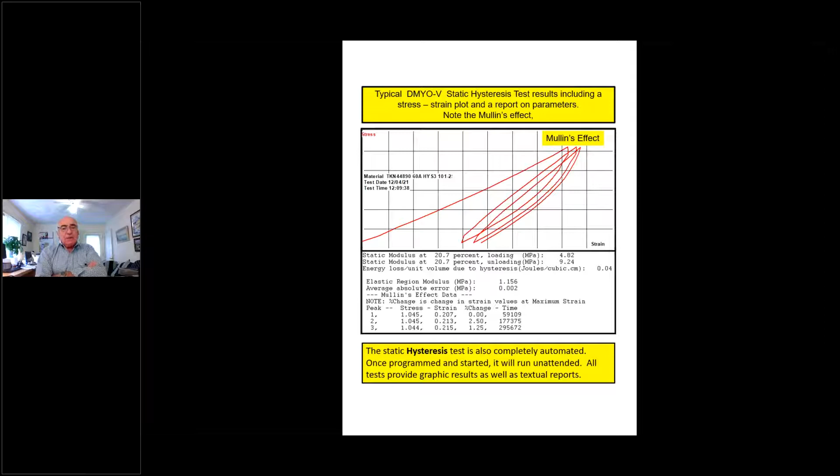Okay, this is called the static hysteresis test, which really is, as we go back to the moving table, we can initiate that motion, say, between 0.1 inch and 1 inch increments, meaning the table moves and stops for a second or 5 seconds or whatever you choose. And then it takes a measurement. It carries on, moves another increment, the same increment, and takes another measurement.

And that's more of a static testing. As it does that, it can do as many cycles as you want. Now, if we look at this plot, in this case, we have 3 cycles: the first, the second, and then the third. That's what we call the Mullins effect measurement.

And in our report, as you can see below, at 20.7%, we do take a measurement of static modulus on the loading side, which is 4.82, and loading side is this side, and the unloading is along this line here. We also report unloading static modulus at 9.24, almost twice. Energy loss per unit volume is also reported.

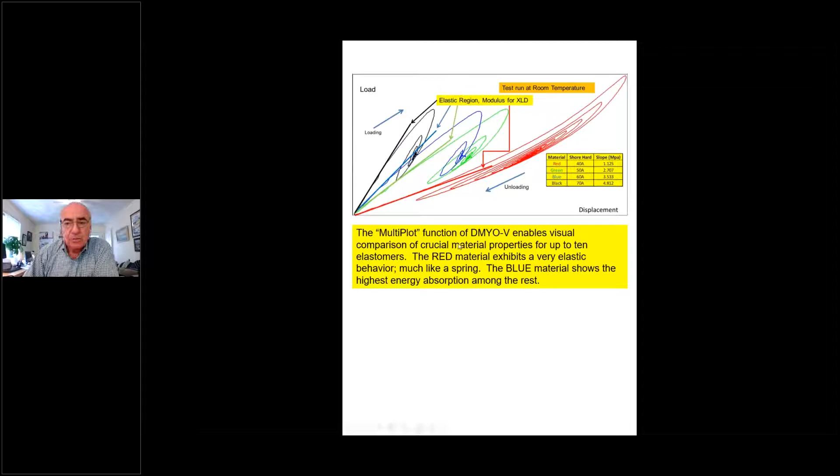Then comes blue, 3.1, and black at 4.8. These are different slopes, taken in the linear region, meaning right about here. And we relate this to cross-link density, relatively measured. That's what we think is very important to figure out—not an absolute measurement, but a relative measurement.

We go to the next slide. Here we have a loading curve in compression, showing absorbed energy at loading, and then released energy at unloading. Hysteresis is the difference, of course. As the material is more elastic, that difference is much less. If it is more plastic or more damping, the difference is quite high.

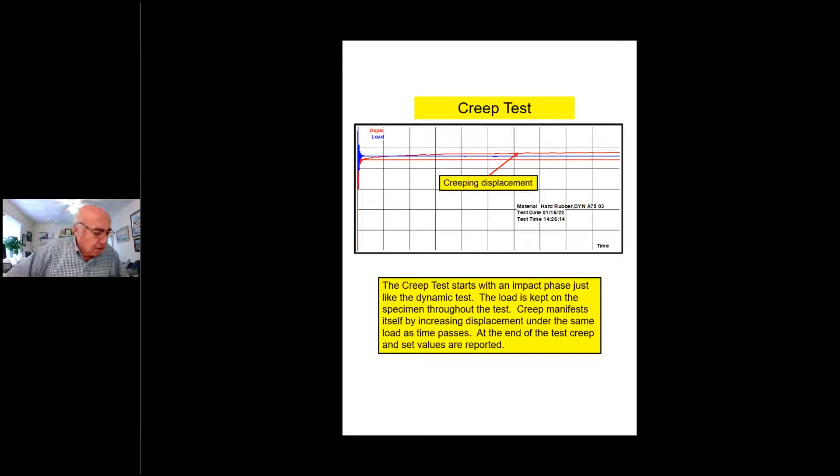Last but not least, creep test. We also do that, and it is important to measure creep for various end-use applications, such as O-rings and seals. For example, if you think of seals and O-rings in certain applications, such as sealing nuclear waste encapsulated in tanks, you don't want that to leak if there's an earthquake or something.

Meaning, if there's a danger of leak, the O-ring has to recover within its capability as soon as possible, so the leak will be minimized. The natural frequency characteristics and dynamic properties come along very importantly. Of course, for seismic construction—bridges, buildings—seismic waves can be low frequency waves, and it's very important to protect buildings and construction.

Isolation of machinery from ground noise is very important, especially if the machinery is highly precise and highly sensitive to such noise. Also, isolating the ground from heavy machinery is just as important. And that basically is our equipment.

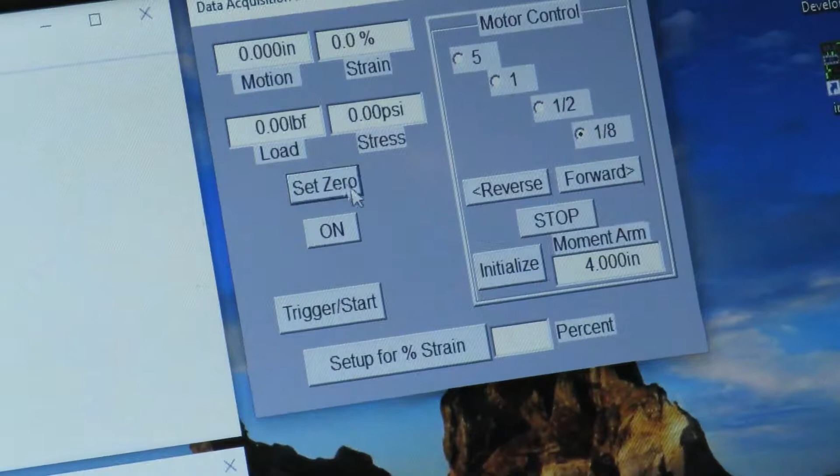Then we will start running a dynamic test, dynamic in compression. At this point, we shall go to the laptop and set our initialization. We initialize and set to 0. Okay, it's set to 0.

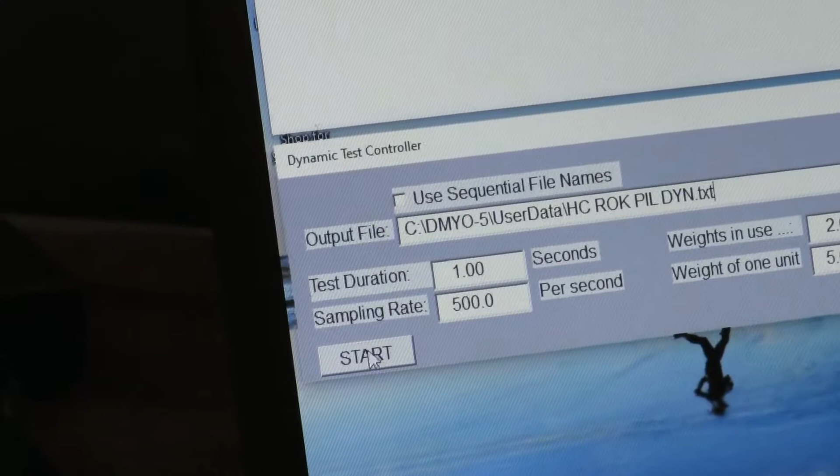Now we initialize, which is 4 inches from the fulcrum. And then we go back and fill in the dynamic test data. Hysteresis—no, this is dynamic. Okay.

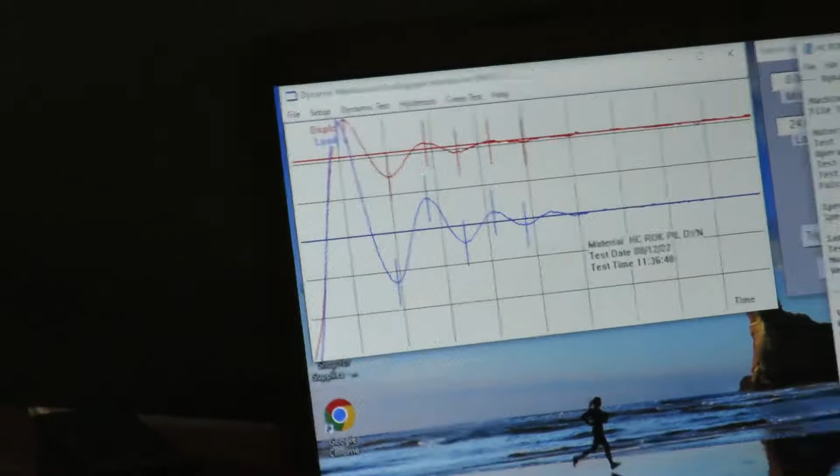Okay, and the plot appears. There are 2 of them. One shows load versus displacement against time, and the other, the earlier one, shows load versus displacement. Then we have a tabulation of outputs, and this tabulation is where the data is critical.

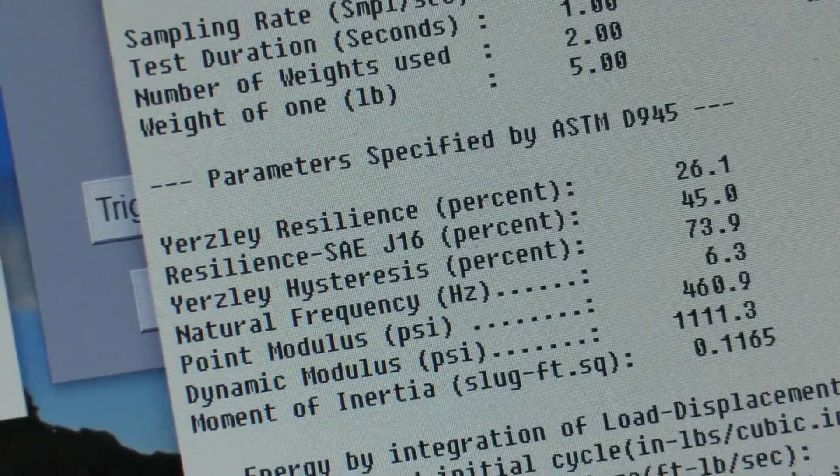Just for example, we would like to point out the Yerzley resilience and its group underneath, which is common in D945-22, the latest version of the ASTM test method. And then underneath, there's another group of energy by integration of load-displacement, and the next one is loss factor and loss angle.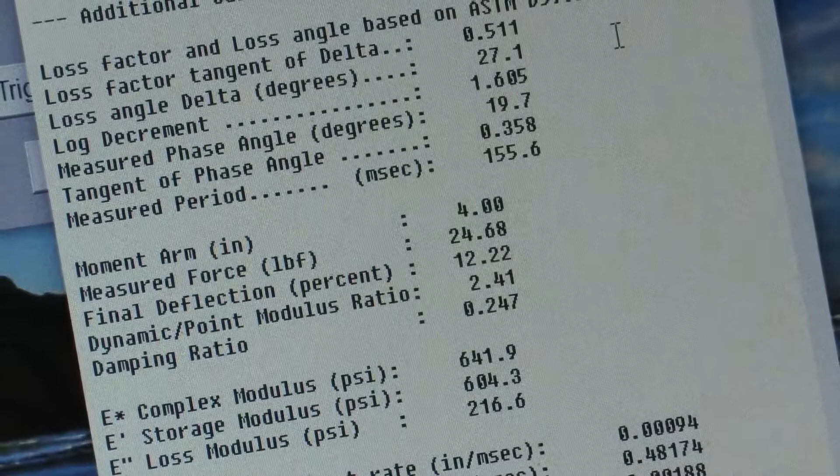The measured calculated loss angle delta is 27 degrees, and measured phase angle is 19.7, directly measured. Then we see the moment arm, and then the complex modulus, 641 psi. We have this output which we can use for dynamic tests.

And then we can have a hysteresis test, which will be a test of static measurements.

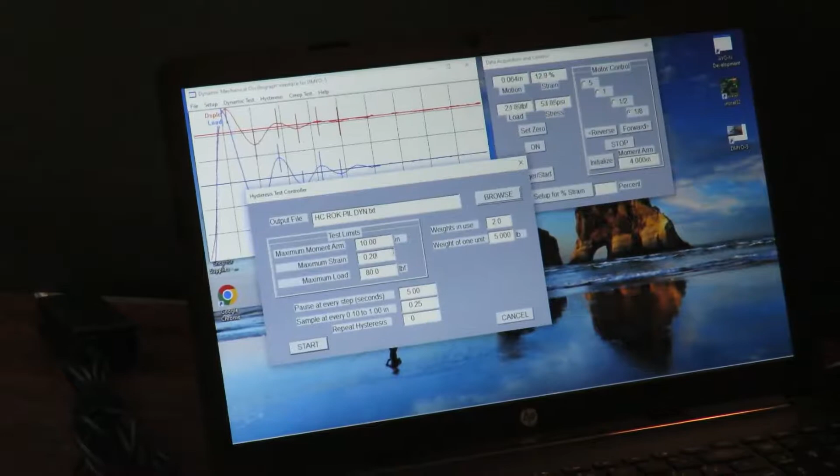Okay, we have the data input which says minimum, the maximum moment arm 10 inches, maximum strain 20%, maximum load 80 pound-force, pause at every step of 5 seconds, sample near between 0.1 and 1 inches, in this case a quarter inch.

At this point we change to 2 seconds stop, and the hysteresis repeat is 2. The weights are 2, each weighing 5 pounds.

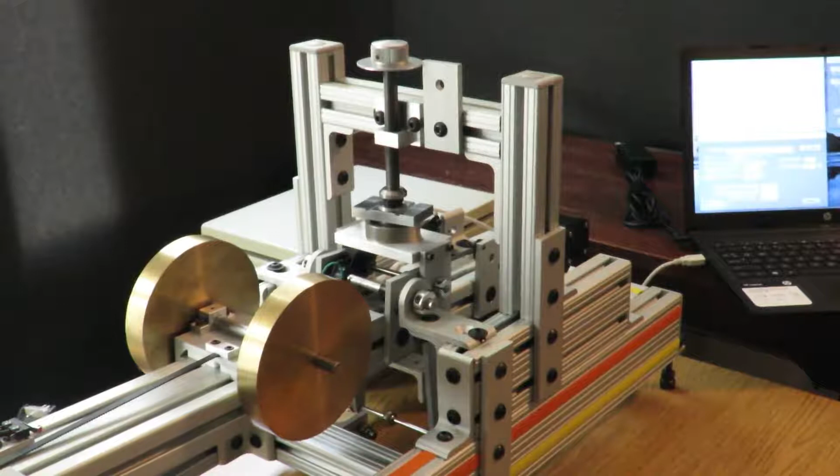Once we do that, we go back to the table and start the test. As we initialize, the test starts. The moving table moves with weights on it and stops at every half inch. When it hits the limit of 10 inches, or 40% strain, or 120 pound-force, it reverses.

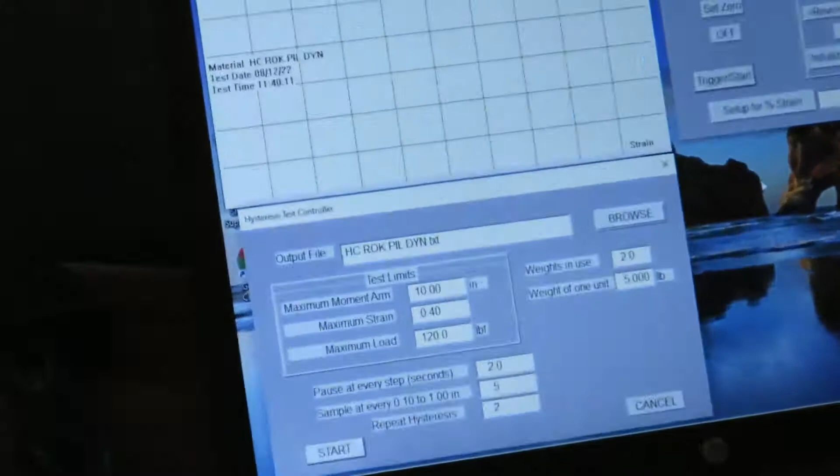What's important in hysteresis is loss of energy. As the specimen experiences compression forces, when the forces are reversed, some of the energy is wasted in the viscous component, and the elastic component, of course, stays the same. However, it depends on the filler structure, the agglomerate, mixing,

cross-linking structure of the final component, and how it behaves once it comes out of a mold. It is also important to know about this behavior as something called Mullins effect, meaning if the component keeps experiencing repeated stresses, it softens up. How does it soften up? It softens up because agglomerates start breaking up, forming smaller agglomerates, and therefore voids are lost, so it becomes more dense. But on the other hand, the cross-link structure, the carbon-carbon double bonds, are breaking up. As they do, the material softens up.

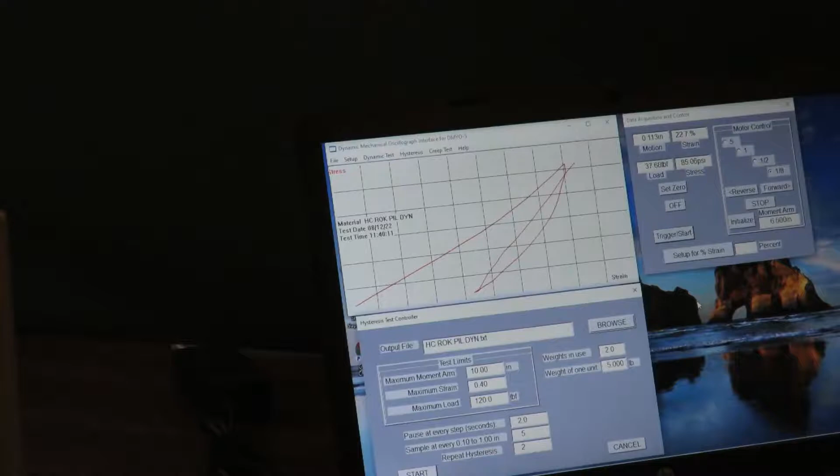The shear specimen is composed of two rubber components bonded to three steel platens, and the forces are perpendicular to the beam. So in this case we have a shear specimen which we will run a dynamic test on, and as we can see there are two weights on the traveling table, and that is ready to run now.

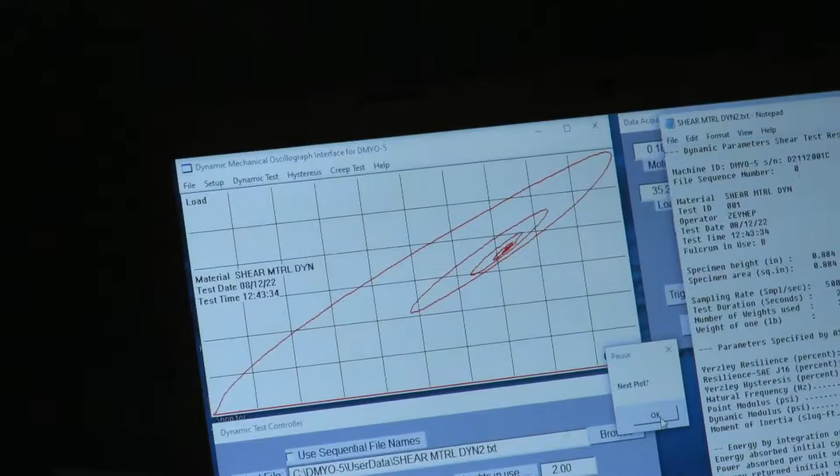The first plot is our load versus displacement plot, and it's very clear. And then the next one is load and displacement against time. Tabulation is on the right, and we see outputs from there as we did before.

We shall run a creep test on this shear specimen, same conditions as we did on the dynamic test, and we will allow 60 seconds for the creep test. We are setting up, ready to go, and go.

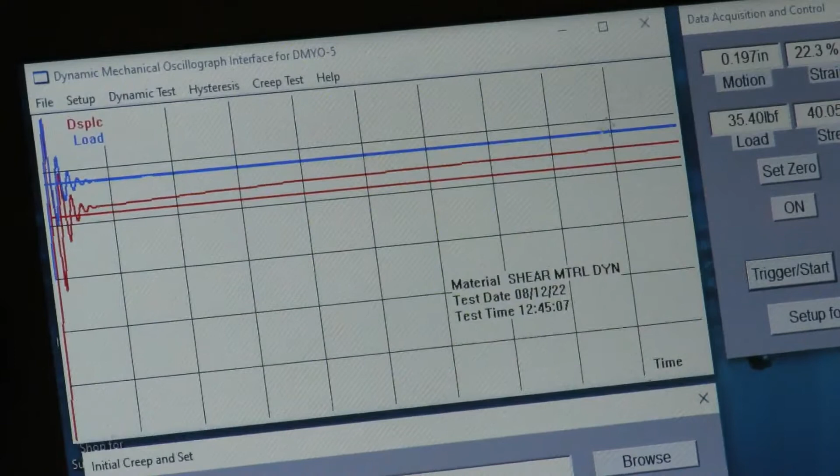Once the creep starts, the plot collapses towards the left, and the displacement shows that the creep is actually happening, which we can see a little bit here, as you can see, as the seconds move, the bar graph at the bottom shows the time function.

Creep is very important for products that go into constant strain, constant stress situations under weight, such as heavy loads, seals, and anything that seals a product from ambient conditions has to be designed for good creep properties.

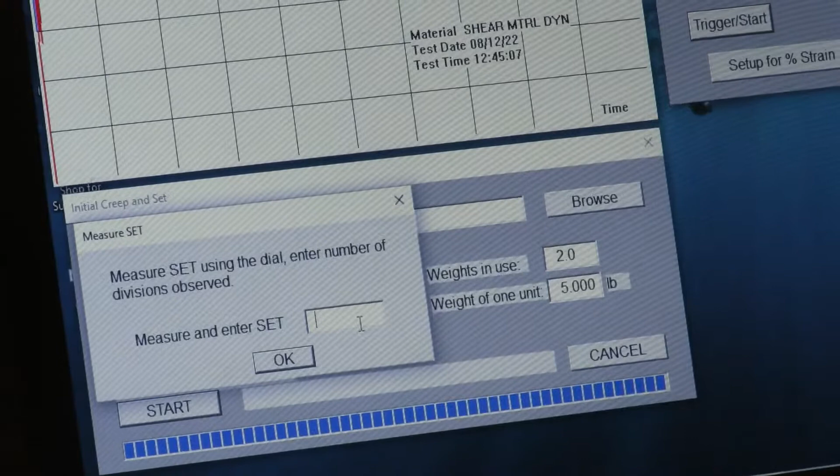At this point, we have to measure the compression set and include that in this calculation. And the dial here gives us the compression set measurements.